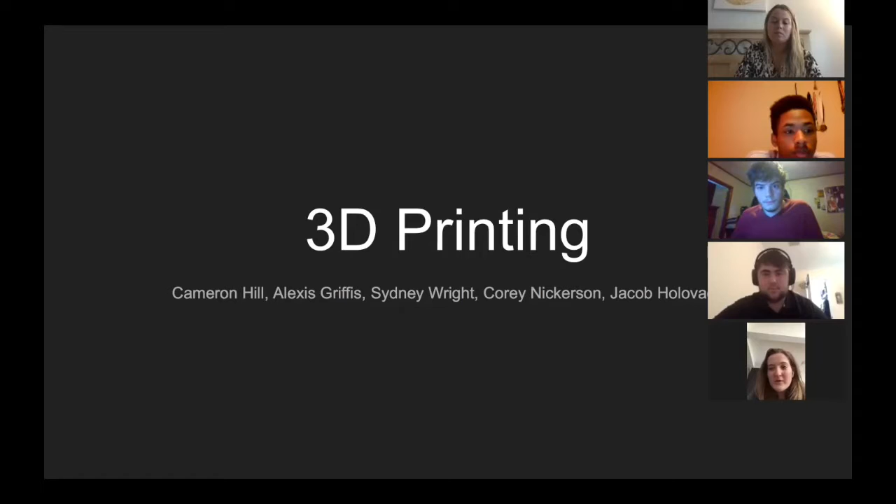After researching about 3D printing, we learned the impacts on businesses, the relevant issues, and the concerns regarding 3D printing, and this is what we learned about it.

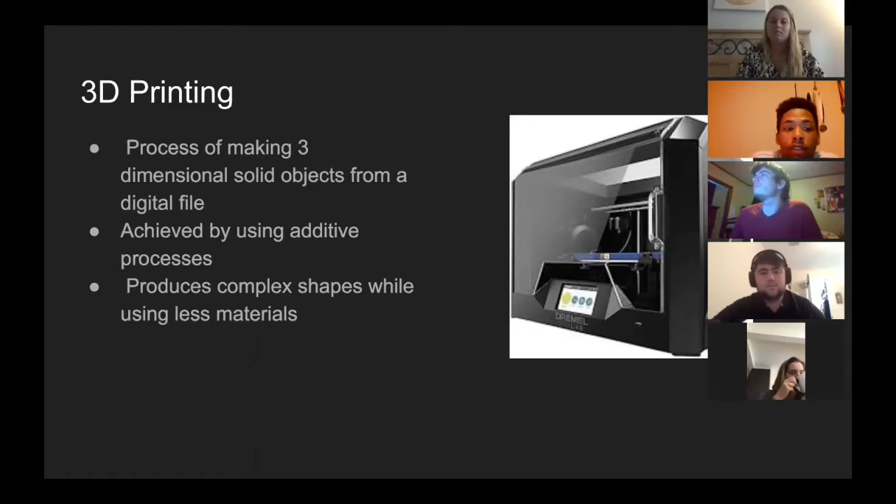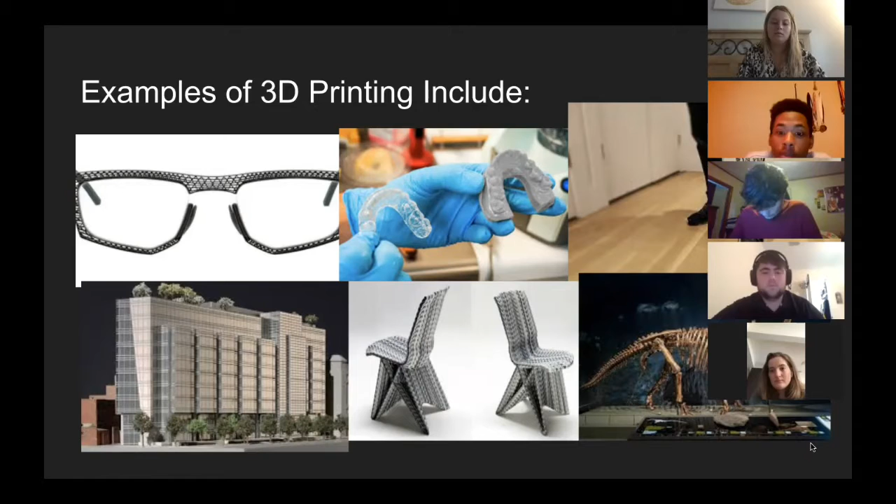3D printing is a process of making three-dimensional solid objects from a digital file. This is achieved by using additive processes, which is when an object is created by laying down successive layers of materials until the object is made. 3D printing allows you to produce complex shapes while using less materials than traditional manufacturing methods. Examples of 3D printing include eyewear, dental products, prosthetics, architectural scale models, furniture, and even reconstructing fossils.

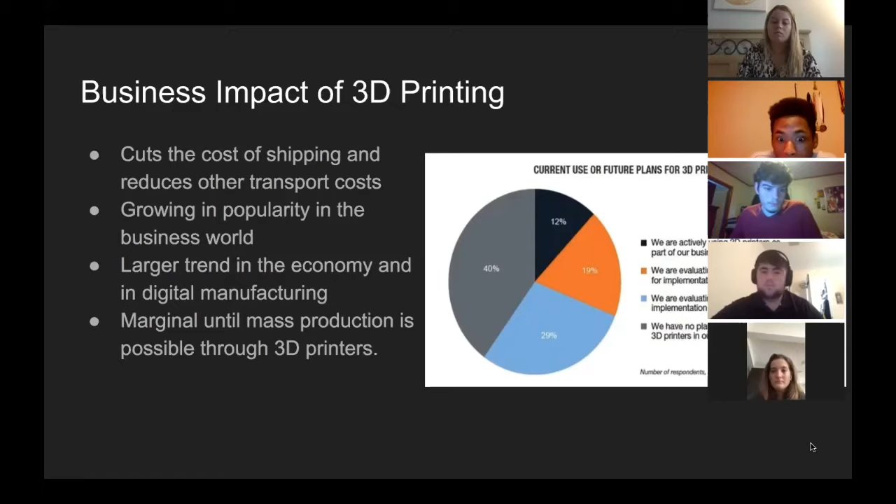3D printing makes life easier for a business by cutting cost of shipping and reducing other transport costs. It is becoming more popular in the business world. 3D printing is an element of a larger trend in digital manufacturing, an element of a larger trend in the economy. When mass production is possible using 3D printers, the effect on the world economy and on cross-border trade will be huge.

So the ease of use of 3D printing is proven in this news story from the beginning of the coronavirus pandemic. A 12-year-old boy invented a solution to the annoyance of wearing masks for hours at a time for nurses and doctors, by creating an ear guard to protect against the annoyance of the mask on people's ears. This design is easily shareable across the United States, and people at home with their 3D printing machines can easily print out dozens and dozens of these ear guards for people. Just seeing how a 12-year-old boy can create something on a 3D printer shows that it can be very simple or very complex.

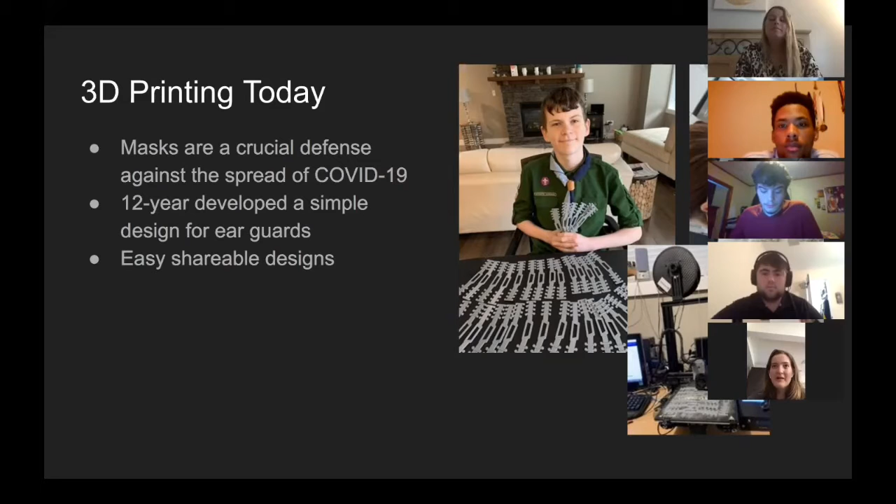One issue would be output quality problems, just because 3D printing is based on a machine, and they use plastic filament for it, so it really just depends on how sturdy the plastic is. Some people may not use plastic, they might use metal or other materials, so that can be an issue if it doesn't come out just how you want it.

Costs are expensive for the equipment. They can tend to cost thousands of dollars for a machine. And then plastic is usually cheap, but it really just depends on how much you're making and how sturdy the plastic may be, or if you're not even using plastic.

Limited materials, of course, it's based off the plastic. It's preferred because it melts quickly into shape, but not all plastic may work, so that's why people tend to use glass, metal, or gold as well if they want to. It also impacts the environment because we are using plastic, and it contradicts our environmental movement to reduce reliance on plastic.

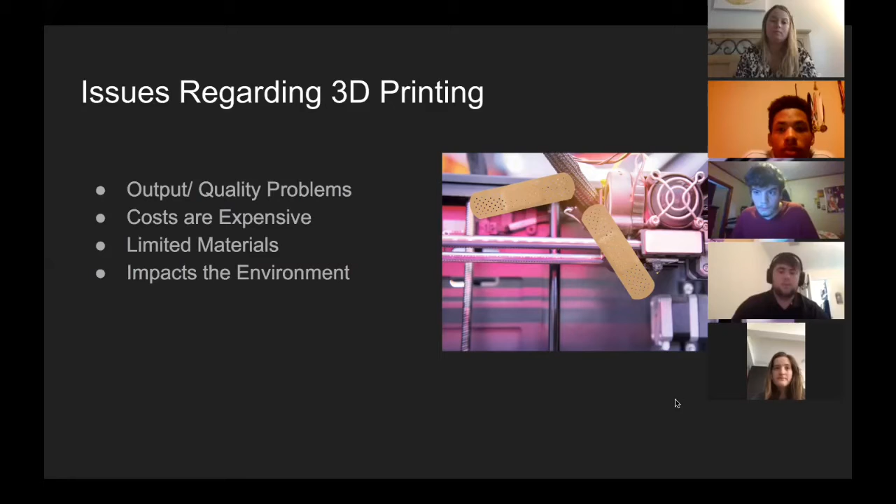It's doing it again. There we go.

So why should you 3D print? 3D printing gives design freedom to create what you want. Customization allows you to make it yours in a way that maybe other people haven't done. Sustainability is done to the best of its capabilities. It would have that.

Speed really just depends on what you're making. It could take up to days, it could take a couple hours, it really just depends, but it's quicker than other machines that can make it. Competitive advantage gives companies an advantage just because not everyone has a 3D printer, so it allows them to have their ideas out in a visual representation. And then consistency: if you have one design, you can create multiple of that design, or hundreds, and it would still look the same depending on the plastic.

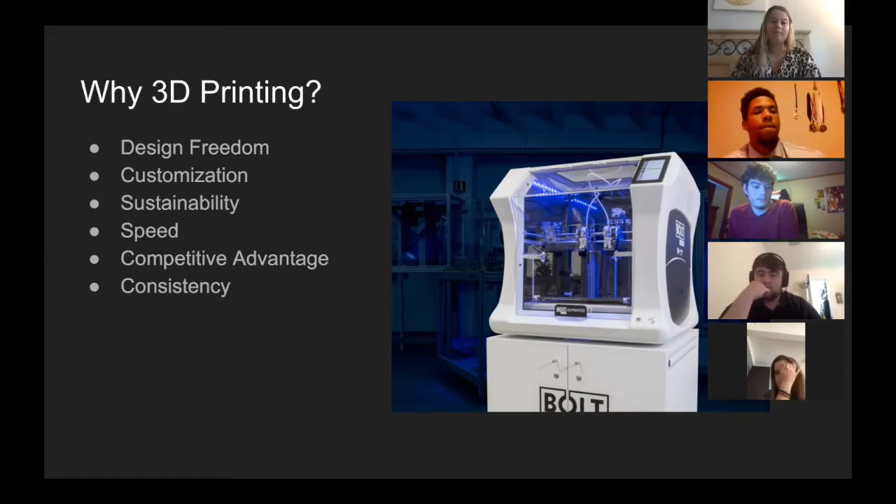3D printing is helpful when it comes to being able to show our customers possible prototypes of our products. It's also easier to show somebody something than to tell them and describe it to them, by showing them an actual representation of it. It helps people get the bigger idea of your projects if you show them little pieces at a time, and it can even help fill up the small missing pieces around the office in many situations.

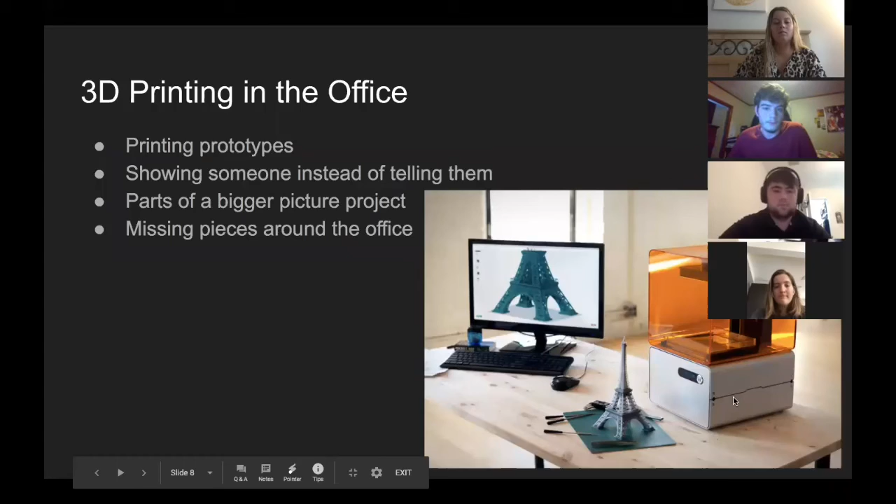Okay, so of course 3D printing gives a business an advantage. Possibilities are endless. It's a great way to save money as a business, and reduce the cost of having somebody put something together physically.

3D printing can also help the environment by eliminating the use of fossil fuels, by just being able to use electricity instead of burning things. I've also seen that they're using 3D printers to print pieces to build houses. It's just basically the next step for us as a society.

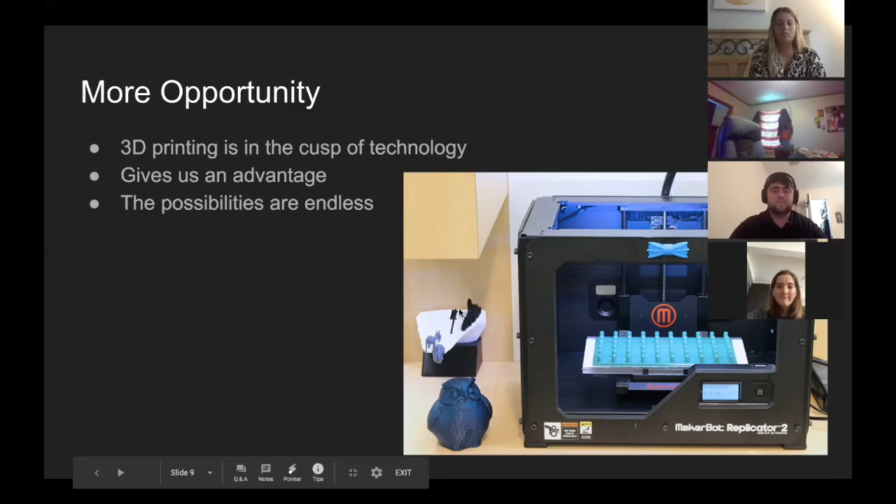And that's it. Okay.